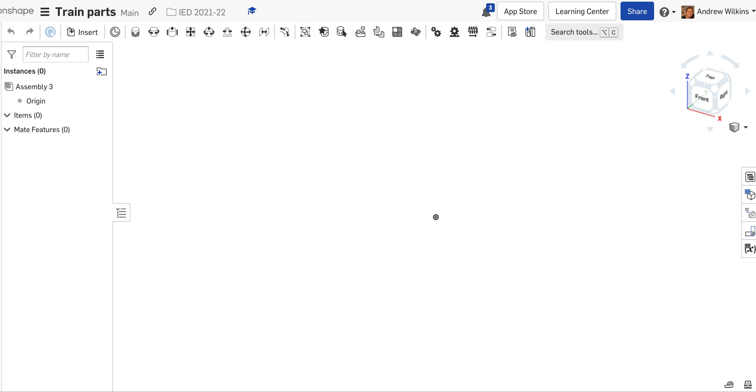All right, I'm going to show you how to assemble your train in Onshape. The first thing you need to do is make sure to create an assembly, and then you're going to insert the parts. So I'm going to insert...

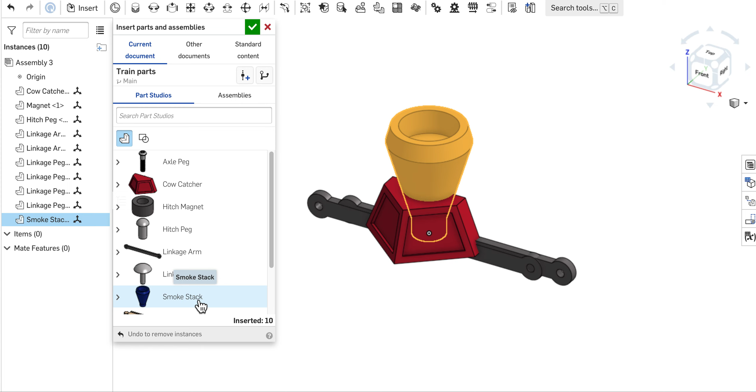Let's see, 4 parts. You will not have an axle peg, we'll pull that from another spot. So we need to insert 1 cow catcher, a hitch magnet, a hitch peg, 2 linkage arms, and I'm just clicking for the number of times I want it, 4 linkage pegs, a smokestack, the track we'll do later, a train body, and 4 wheels.

Once I've inserted those, I can click and that will place all of those, and then I'm going to get axle pegs from the standard content.

In the standard content, we should have ANSI inch selected, bolts and screws selected, socket head screws selected from the class, and then in the component, socket button head cap screw is what these are called. Your size, you're going to want to select 1/4-20, and then the length is 1.

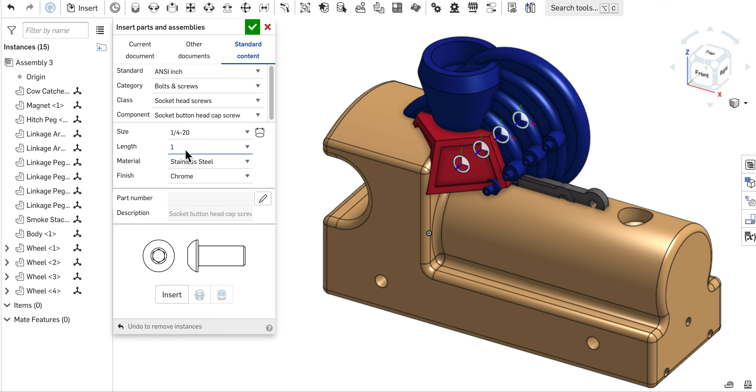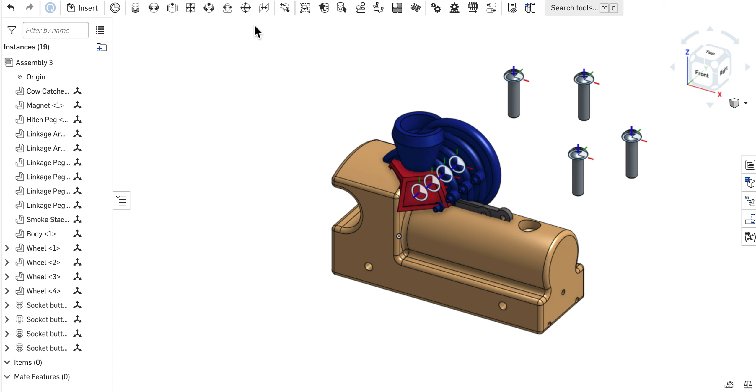After you have those all selected, you will click the insert button and then place, and that will do 1 at a time. So there's 1, 2, 3, and 4. And then I'll hit the check mark, and I will begin assembling the body, or the train.

So I'm going to start with the body, and I'm going to move it just kind of out in the way for a little bit, and I'm going to choose to fix this. So I did a right click, and now I'm fixing the body in space. And so what that does is it makes it so I can't move it at all.

That's going to be beneficial so we can tell if the wheels are moving the way they're supposed to. Next thing I'm going to do is I'm going to figure out all the things that are going to be fasten mates, and I'm going to take care of, actually, I'm going to do the revolute mates first, and then I'll do the fasten mates.

So right now I'm just kind of moving things away so it's easier to find them. So there's that, move that up there, and then I think I'm just going to grab all 4 of those things and move them. Oh, that was fun. Over here. Okay, that should be fine.

Alright, so the first thing I'm going to do is get these wheels connected. If you don't like that the mates are showing up on the wheels, I can go ahead and hide those. 2, 3, 4. That'll make it easier for you to see.

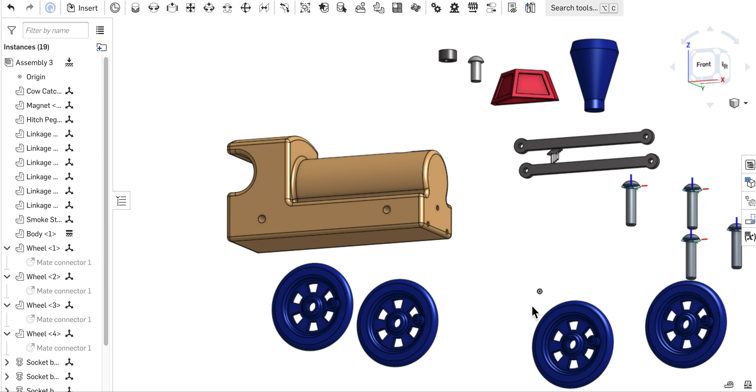Okay, so what I really want is I want the wheels to revolve around the axle that's going to go through this hole. But the computer doesn't really need the axle there in order to do a revolve. So what we're going to do is we're going to just do a revolute mate.

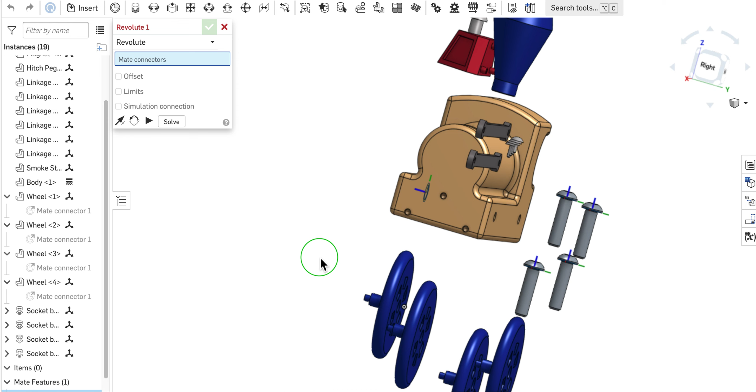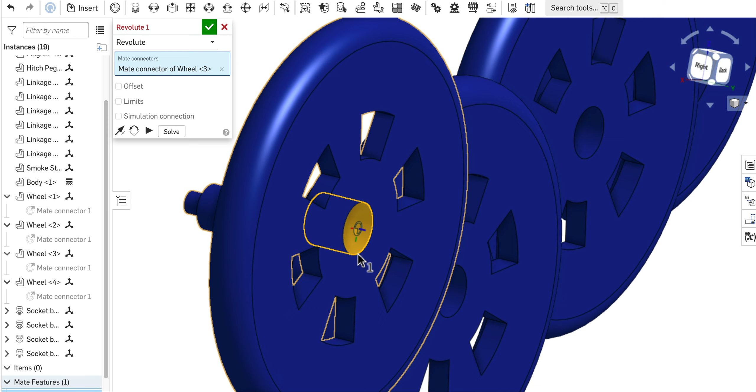And I want these wheels to butt up right against the body. So what I'm going to do is I'm just going to select the, oops, that made it difficult, didn't it? I'm going to select the outside of the hole. So that right there. Oh, I shouldn't say the outside, the back part of the hole of the wheel.

And I'm going to connect it to the outside part of the hole on the body. And it's showing going the wrong direction there. So I'm going to switch directions. And that's the right direction. And then I'll hit check mark.

And I can check and see that this thing actually revolves. And it looks like it's revolving, so that's good. There we go, that's a little bit better. I was having a hard time grabbing it earlier.

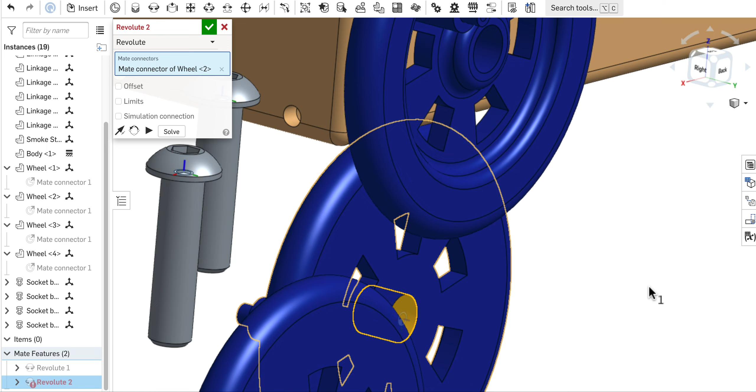And because I hit the check mark on that tiny box, a new revolute mate has already started or is waiting for me. So I'm going to do the next one between that hole and that hole. Switch the direction so it's facing outside, hit the check mark. And that one should also be revolving. Yep, looks good. All right, so now I'm going to go to the next one.

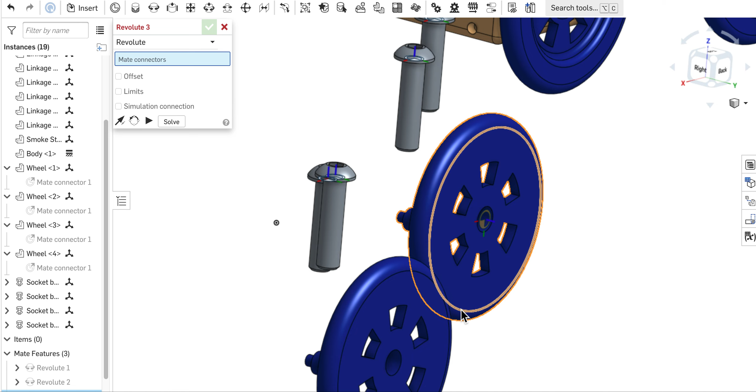I'm going to get the back of this hole. I'm going to get the outside of this hole. And that's actually connecting correctly. Check mark that. And then one more time.

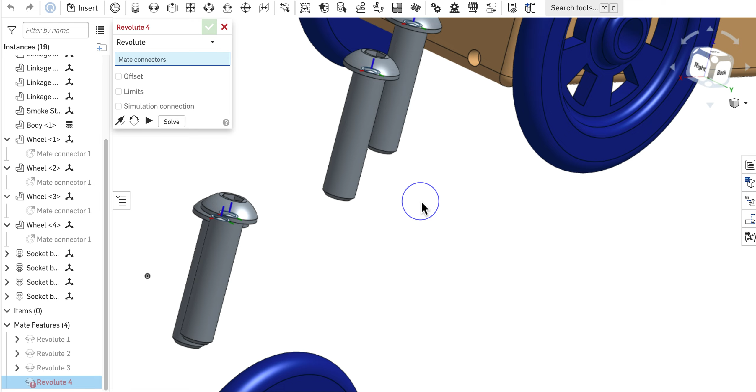I'm going to select the back of that hole, turn this around, and select the outside of that hole. Check mark that.

And now we're ready for the next part. So I'm going to keep on the revolute mate because my linkage arms are going to have to connect to these wheels in a way that they're allowed to revolve, because we need that piece on the inside. This piece right here is going to need to be able to freely revolve inside of the holes of the linkage arms.

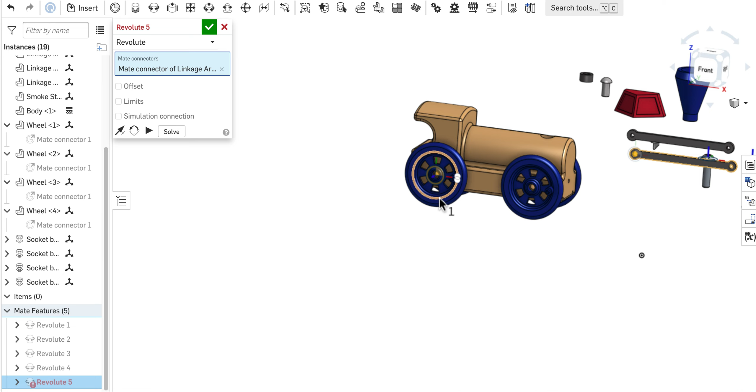So I'm going to choose the outside of this hole, and I'm going to link that to the outside of this thing right here. All right, it's going to connect outside to outside. One of the things to remember when you're doing the mates, you're basically telling the computer which two planes you want to be in line with each other. And so that's why I'm choosing the ones that I do. So I'll check mark that.

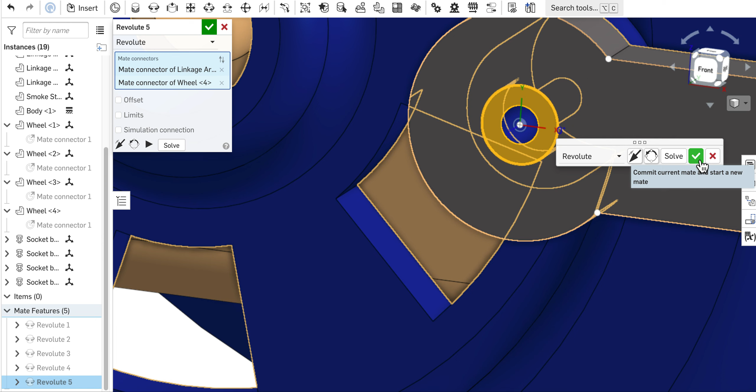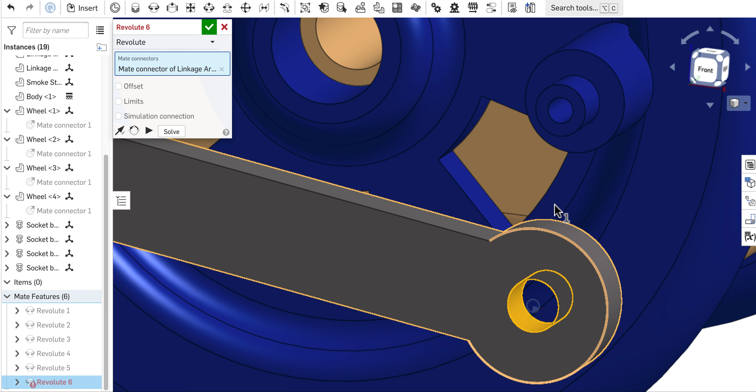It's ready for my next revolute mate. And this looks like it's already linked, which is crazy. It's actually not, that almost never happens. I don't know how I got that to happen. So I'm going to do the same thing though. I'm going to choose the outside of this hole and the outside of this. Link those together, check mark, good to go.

And then if I move this bar, it should move the wheels. Yep, now right now it's going all wonky. We can fix that later. Eventually it kind of just fixes itself, but then later on it'll go wonky again.

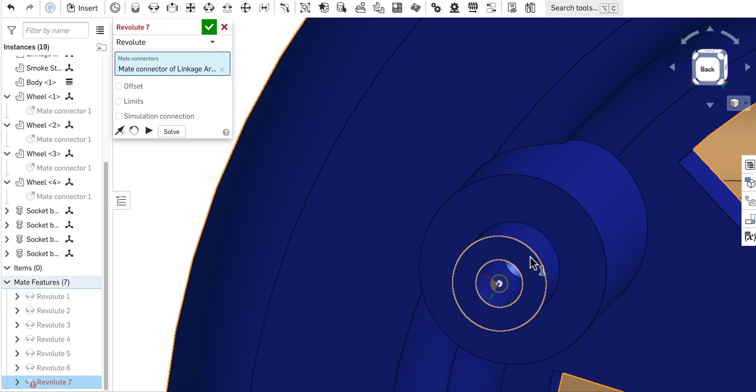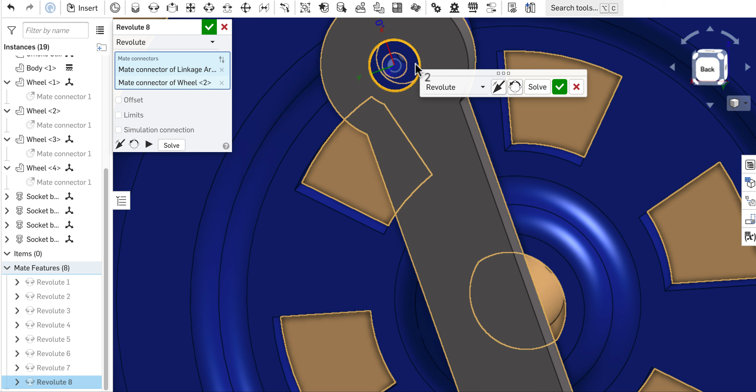So I'm going to do that same thing to the other side. Going to find my linkage arm, find the hole, click on that, and then it doesn't matter which one of these right now that I choose. So I'll choose this one. That one's ready to go. And then choose this. And then choose that right there. Check mark that. And then should be good.

All right, and that really is all the revolute mates I should have. The other things are going to be fastened, so I'm going to hit the X on this box and be ready for fasten mates. I'm going to double check this linkage arm seems to be working, which it is. Great. All right, so now what I'm going to do is I am going to do a whole bunch of fasten mates.

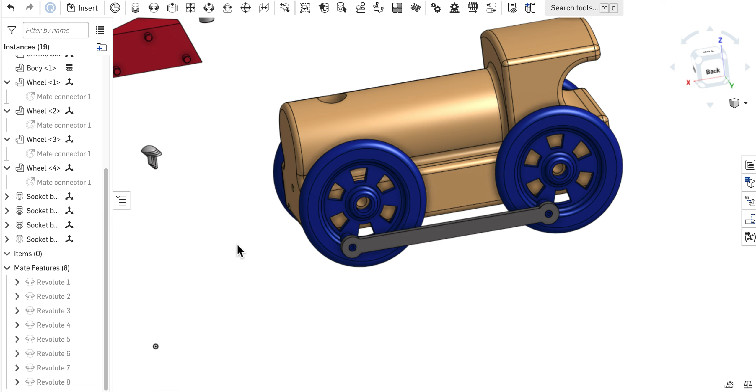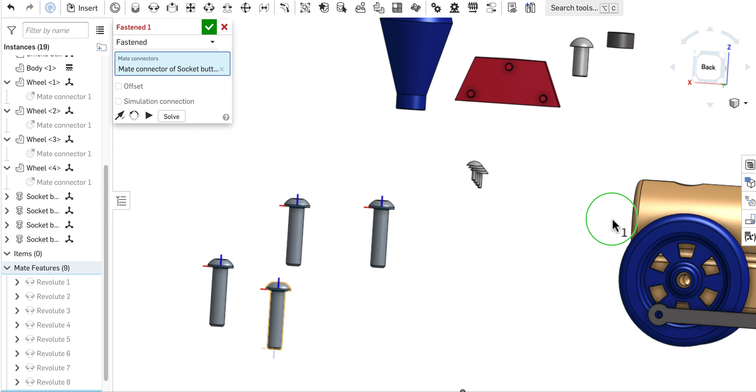So I'm going to choose fasten mate, and what I want is I want this axle peg to go into the hole all the way towards the bottom of this hole. So I'm trying to force the computer to know what to put onto what. So I'm going to put the bottom of this axle peg, sorry that's kind of hard to see. That's going to be my mate connector there. I'm going to link that to the bottom of this hole right here.

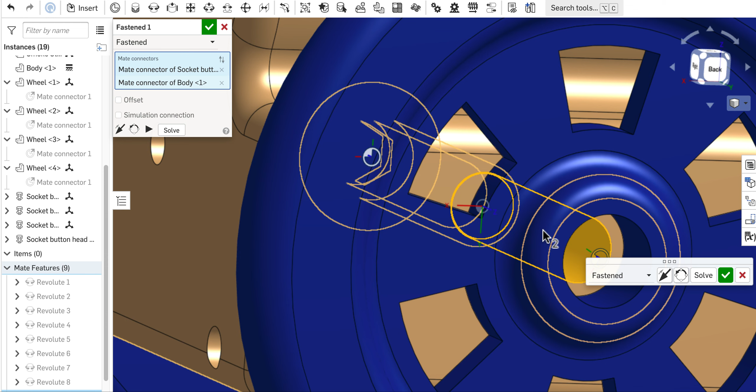I have to be careful because I don't really want the pointed bottom, I want the bottom of the cylinder. So right now I have the cylinder. I'm going to hold shift so I can move to that back spot right there. And then I'm going to take a look, and it looks like that thing is on the other side of what I want. So I'm going to switch directions. And then furthermore, it's not really out far enough. There's some distance in there that we need to make up.

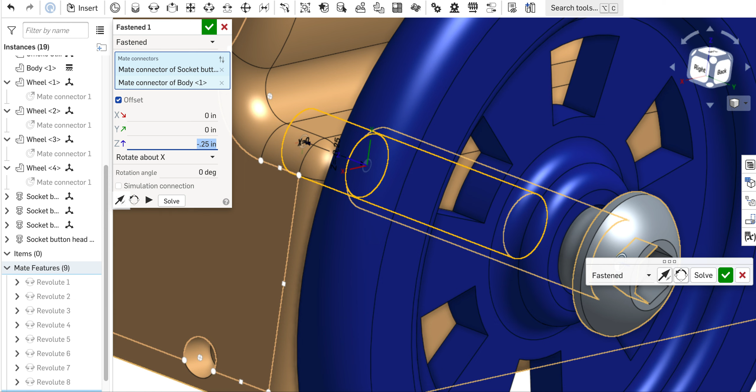And so I'm going to throw an offset in there in the Z direction. And I think 0.25 inches is probably too far, but I'm going to try that. Okay, and that made it go the wrong direction. So I'm going to do negative 0.25. All right, and that brought it out pretty far, definitely farther than I wanted.

So I'm going to try negative 0.14. Okay, and that looks pretty good. There's a little bit of a gap there, but that's a reasonable amount of gap to allow the wheel to actually spin if I were creating it.

Now I want to make sure that I use that same offset every time. So I'm going to make sure that it's a distance of 0.14. It might be negative, it might be positive, depending on which side of the train I'm on, but it should work out. Oops, and I accidentally hit the check mark on the main box instead of the little box.

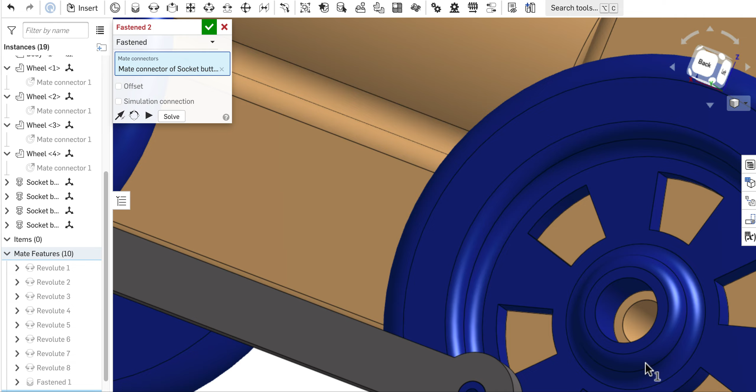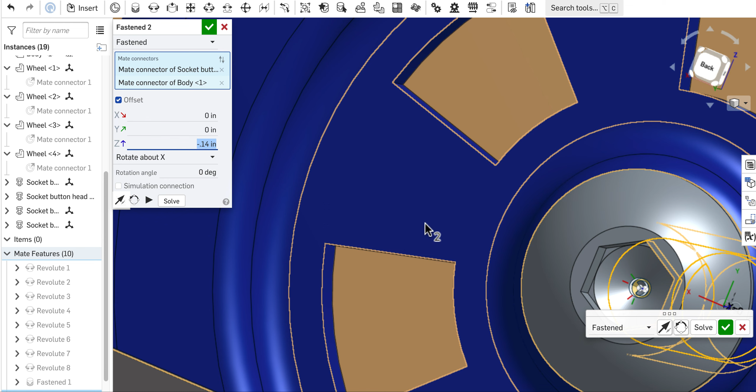So, all right, so I'm going to choose that mate right there, and I'm going to go to this hole right here. And once again, I want to choose the back of the hole and make sure the direction is right and set my offset. That's, you can get the idea here. Negative 0.14. There we go. I'm going to check mark this box and then do the last two.

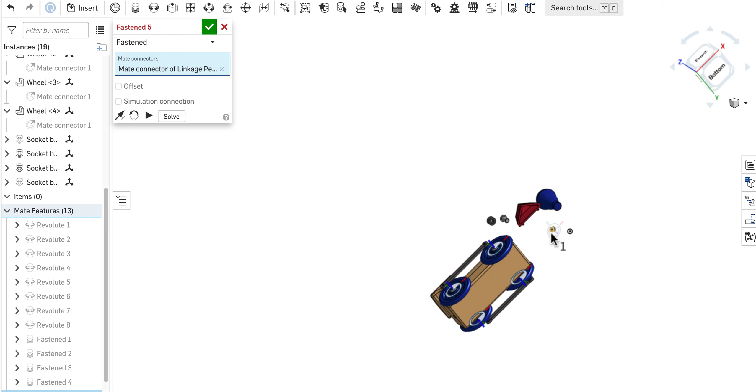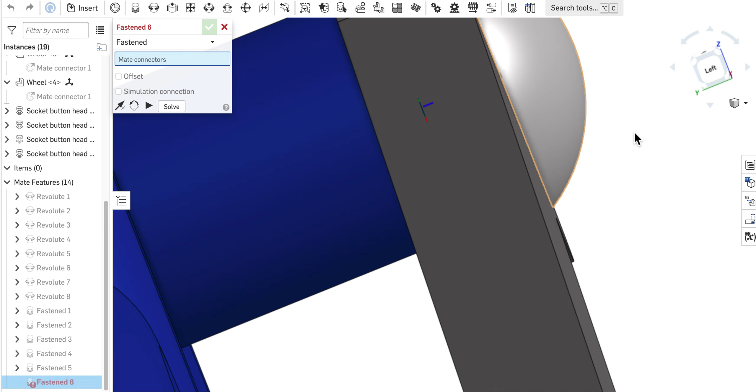All right, now that I have all the axle pegs in there, I'm going to put the linkage pegs in. Very similar sort of thing, although this time I don't think we're going to need an offset. So I'm going to choose the bottom of that and have that go into this hole right here, all the way to the back. Switch direction, check mark. That looks pretty good there. And do that for all four of these.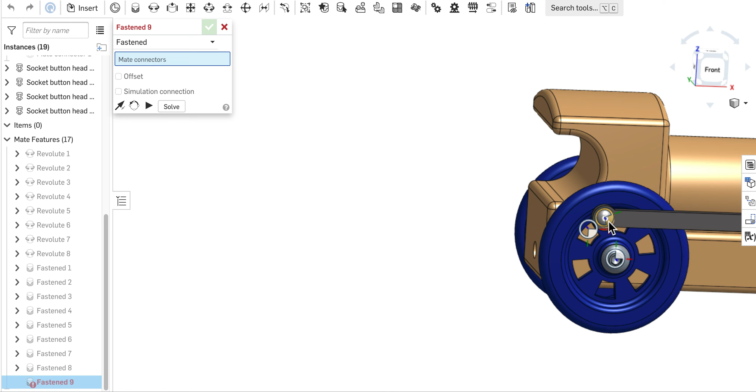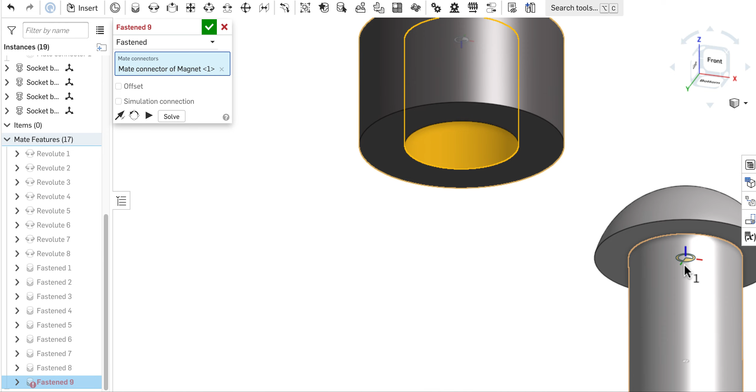Alright, now that the linkage pegs are in there, I am going to fasten the rest of these things. This magnet goes onto this hitch peg, and basically I just want the top of this hole to connect to the top of the cylinder. So I just have to make sure to choose the top of the cylinder.

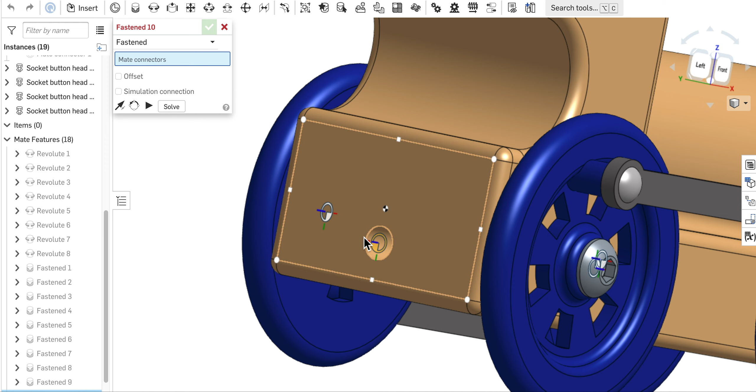There's that. And then I want this cylinder, or not the cylinder, this ring, which is a magnet, I want that to connect to this right here. The magnet should be sticking out, so what I'm actually going to do is pick a point on the bottom of the magnet and then pick the circle right here, and that should match really well.

So I'm going to zoom in here. I want to make sure that I'm on the surface of the magnet. I'm going to choose that as my first mate, and then zoom in on here, get the outside of that hole, switch direction, and then you notice that the peg didn't come with it, but if I hit the solve button, it'll show the peg with it, and then I'll hit check mark, and then that'll happen.

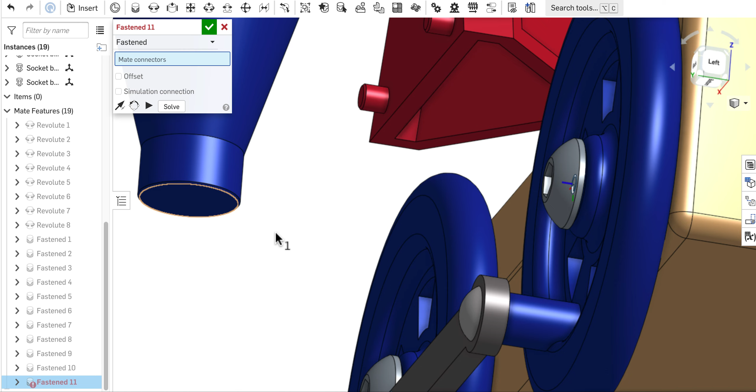So we have that, and then we have the smokestack that we need to do. So I'm going to choose the bottom of the smokestack. I'm going to choose the cylinder bottom. Make sure the smokestack's sticking out. That looks good. Check mark there.

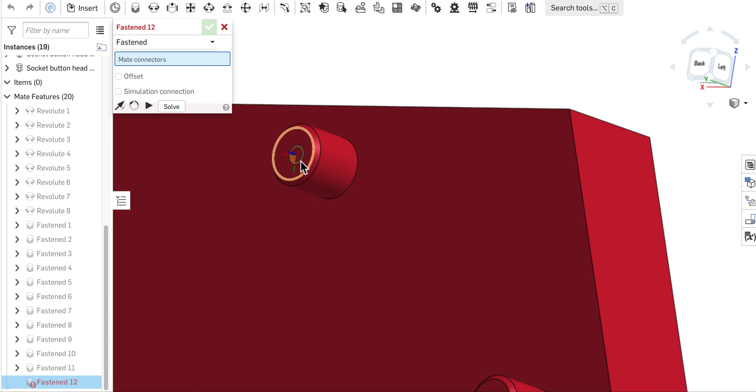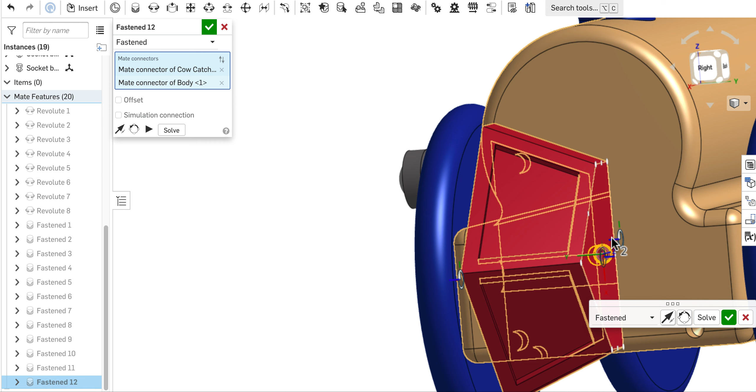And then the last one, again, since we're doing a fasten mate, we're kind of gluing it in. So I only have to pick one of these 3 pegs to glue, quote unquote, into the front of this thing. So I chose the top hole. So I got to choose the top hole here, all the way to the back. Switch directions, and then you'll see it's rotated in a weird way. So I just rotate it until it fits the right spot. That looks good. Check mark, and we're good.

Okay, so for those of you that are like, yeah, okay, Mr. Wilkins, how do we really know that this is put together well? All right, so your little secret here is if you go to this menu and you choose... where to go? Oh, I have to get out of this first. If you choose interference detection, you can highlight all of the parts there, and it'll show you where there's interference happening between parts.

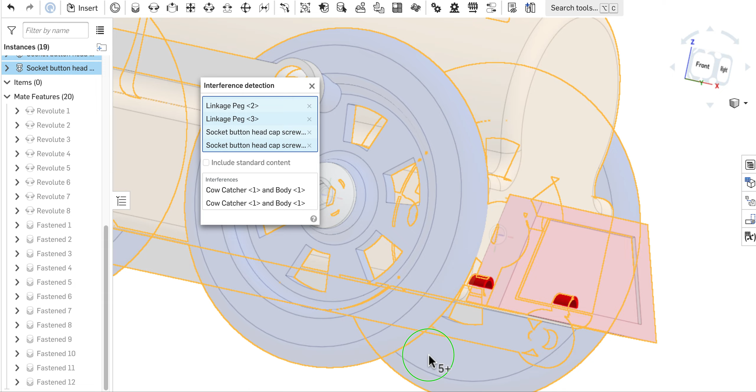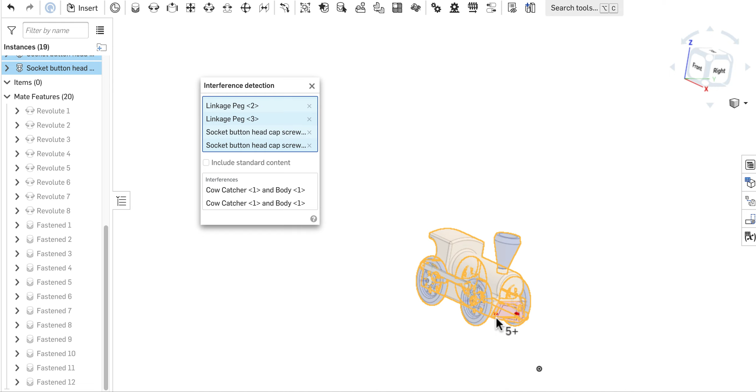Only interference I'm seeing right now is it looks like the holes are a little bit off from each other. That's really interesting, isn't it? So maybe there's something wrong with the body, and those holes are not exactly fitting the way they're supposed to. That's very interesting, so something to pay attention to for sure.

If this is a train that we were trying to make, okay, so that might be where a potential issue is. All right, well, that's that. And then now what we got to do is we need to add in the track. Oh, and yeah, we're good.

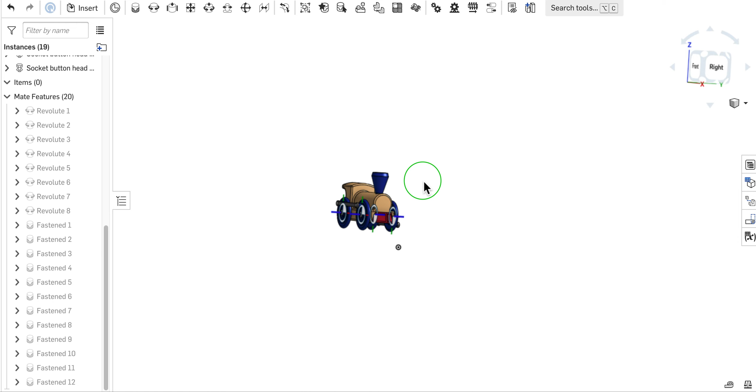All right, so before we add in the track, I'm going to do a couple things. The first thing I'm going to do is I'm going to make it so that you cannot see the mate connectors on those screws, because that gets really annoying. Makes it not look very good. So I'm not... oops, that is not what I wanted to do. I meant to hide the mate connectors. There we go.

Okay, I hid all those. So now what I'm going to do is I'm going to insert the track, and I'm going to do 3 pieces of track. All right, so I'm going to do 1, 2, 3, and check mark there.

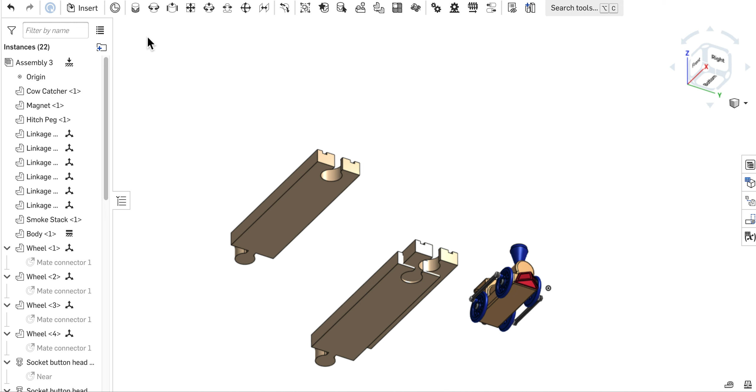Now I'm going to pick one of these, and I'm going to fasten the bottom middle of this track to the origin. That way it's locked in. All right, that thing is not going to move at all. If I try to click and drag it, it won't move.

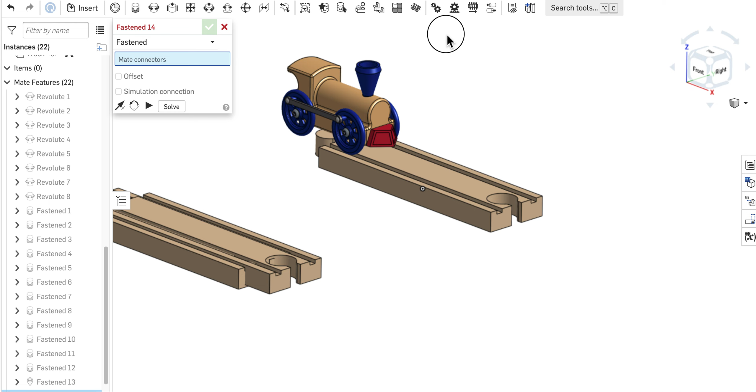Now my train right now can't move either because we chose to fix it. We're going to unfix it so that I can move my train. All right, it's going to get all sorts crazy right now. Then we're good there. It is now unfixed.

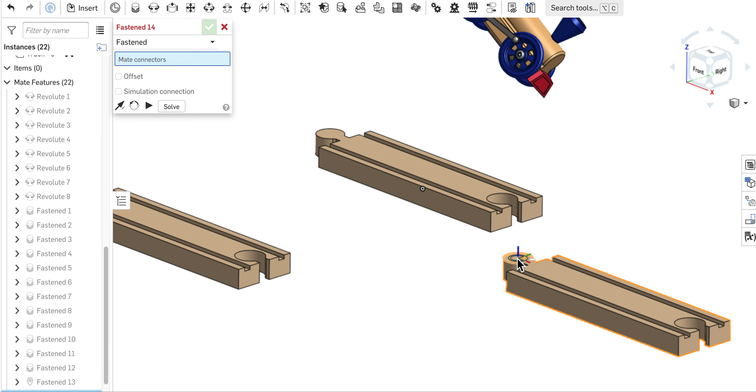And now what I can do is I can connect these track pieces together. So I want the tongue to go into the groove there, and all I need to do is choose a fasten mate and fasten the middle of that circle to the middle of this circle, and that should be good. Now I'm going to do the same thing with the other part of the track. So I'm going to do the middle of that, middle of that. Oops, that did not work. Let's try this again.

Middle of that. There we go. That's much better, check mark there. Tracks are lining up. Good to go.

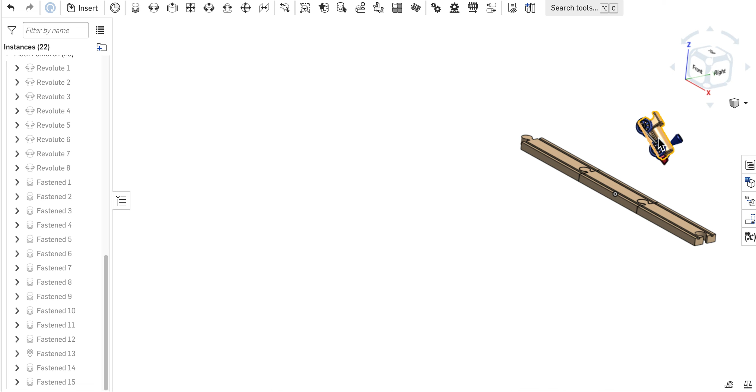So the last part is we are going to connect the train to the track. To do that, you're going to start with a slider mate. We want this train to basically slide along the track, and then we want its wheels to turn as it's sliding along the track. So first we got to set up the slide part of this.

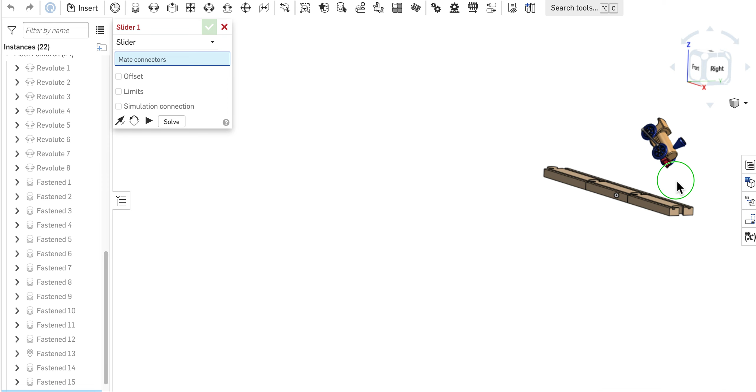What I'm going to do is pick a point that's kind of easy to reference. The key to doing a slider mate is you want to pick a mate on the surface that's perpendicular to the direction you're trying to go.

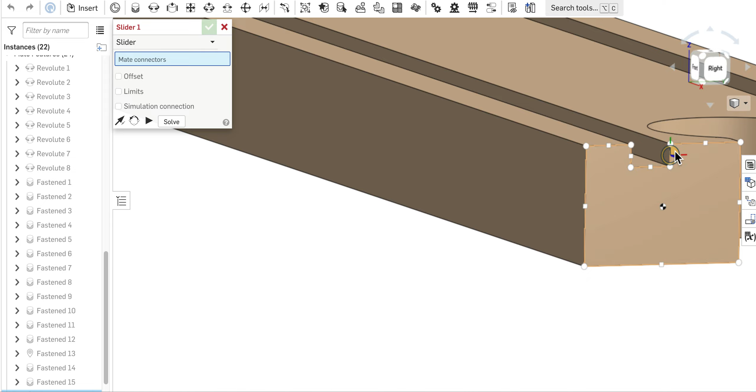I'm trying to go along this line that I've highlighted, but what I really want is the end of that line. So I'm going to choose this surface, and I'm going to choose this point on the inside top corner of the track.

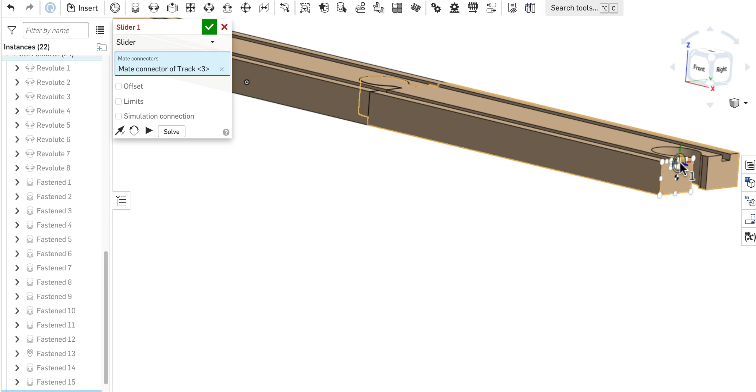I have to make sure it's pointing outward when I do that. So I chose the blue axis, which needs to be pointing outward away from the surface I'm trying to be on. That blue thing is called the z-axis, and what it does is tell you which direction the slider mate is going to go.

Now I want to line that up with something on the train that should be going essentially along that same direction. That thing on the train is going to be the corner where the fillet is made. So that corner right there is what I want.

I'm going to hover over the front surface of this train body, and hold shift, and go down. I want to make sure again that that blue line is pointing outward away from that corner, in the direction I want the train to go.

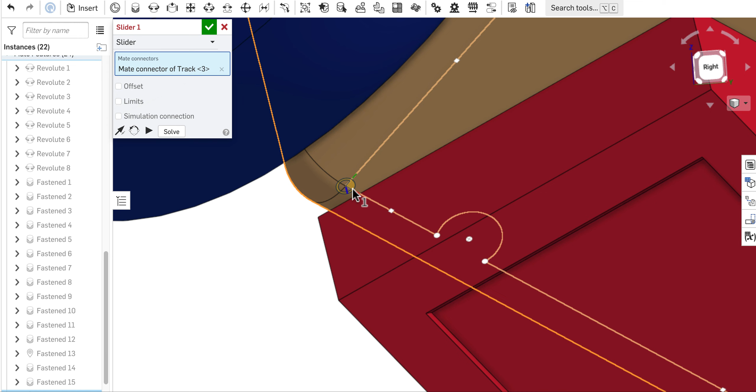It's going to move the body only, which is kind of frustrating — you're like, what is going on here? But again, if you hit solve, that'll bring everything together.

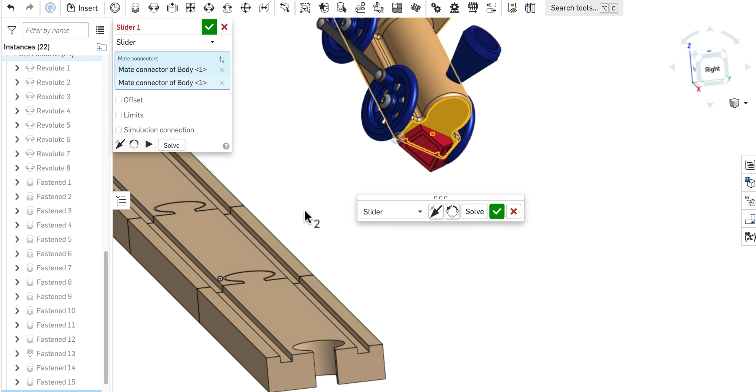I don't know why it's not connecting to the track right now. That's because apparently I chose the body twice. So let's try to do this again. Shift — there we go. Solve.

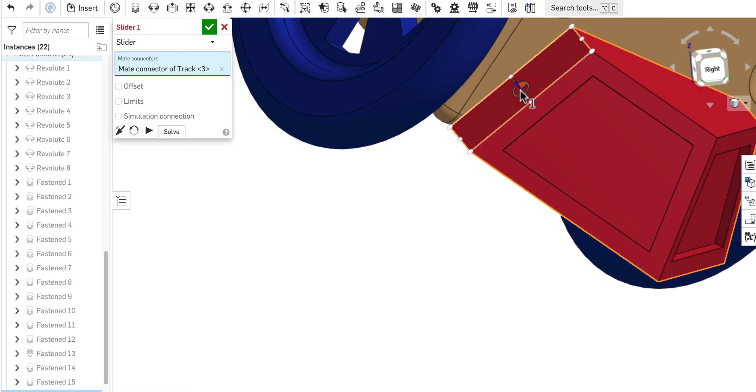I don't understand... let me see if... choose that... this is not working correctly. I'm going to try this one more time. Slider mate between that and that. There we go. Solve.

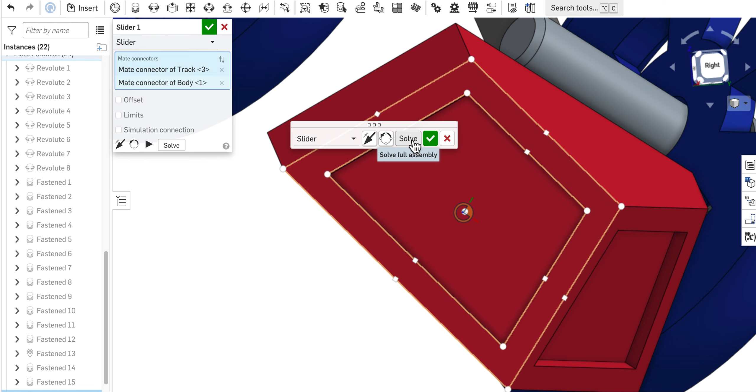That's better. Alright, it's better in one way, but you'll notice the track kind of looks like jello, because the train's just sunk into it. That's because we need to set a couple of offsets so this sits on the track correctly.

So we're going to set two offsets. The first offset is that the x-axis, the one going this direction, needs to be offset by 0.05 — probably negative 0.05, but I'll try 0.05 and hit enter. Yeah, that moved it away from the center. I want to move it closer to the center, so I'm going to do negative 0.05.

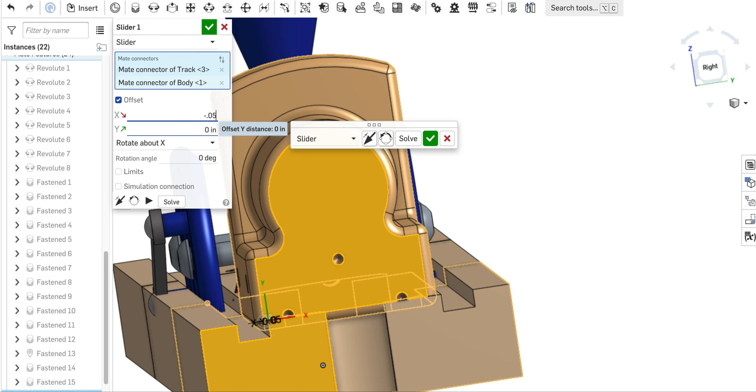I'm going to hit solve, and that's going to bring everything together, and you can see now that the wheels are right in the middle of the track, which is exactly what I want.

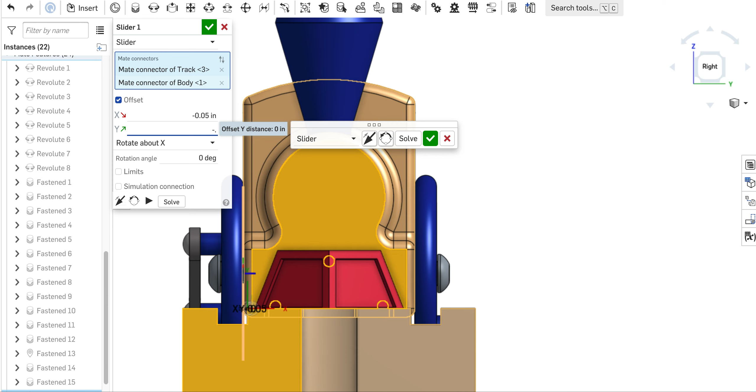Then I'm going to move the y-axis, a distance of 0.54 — I have to go negative so it goes up for me. I'm going to hit the check mark on that, and there you go. Now it looks like it's on the track, and it's riding along the track, which is good.

Now you can tell that the wheels are not moving — they're just sliding, sliding, sliding, and that's kind of weird because that's not how that train's supposed to work.

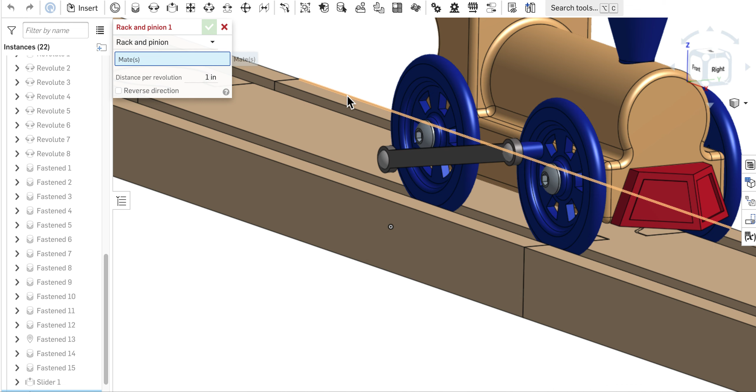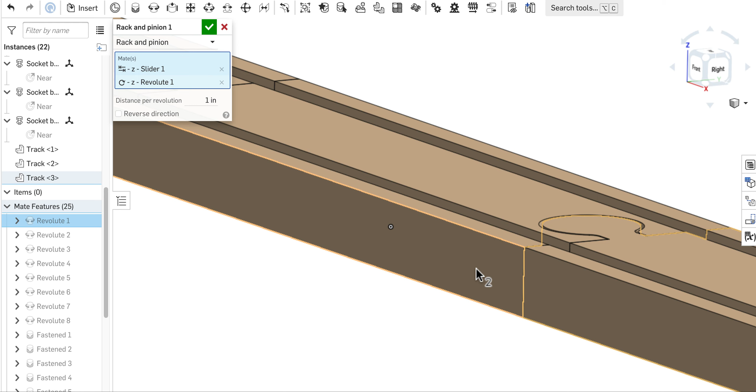So I have to set up a relationship between the slider mate and these things turning. I'm going to do what's called a rack and pinion. On the rack and pinion, I need to choose a slider mate and a revolute mate that are going to connect with one another. The slider mate is pretty simple, I'll choose the one I just made. For the revolute mate, I want to pick one of the revolute mates I did with the wheels, my first 4, so I'll choose revolute 1.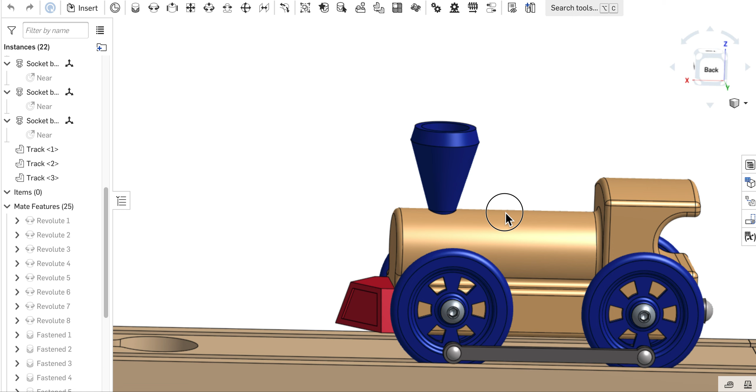There's some stuff that's going to happen here that doesn't simulate very well until we're out of this window, so I'll hit check mark and switch over to the other side. As I slide this thing, you'll notice the wheels are going, but in a weird way. First, they're going the wrong direction, and secondly, they're going way too fast.

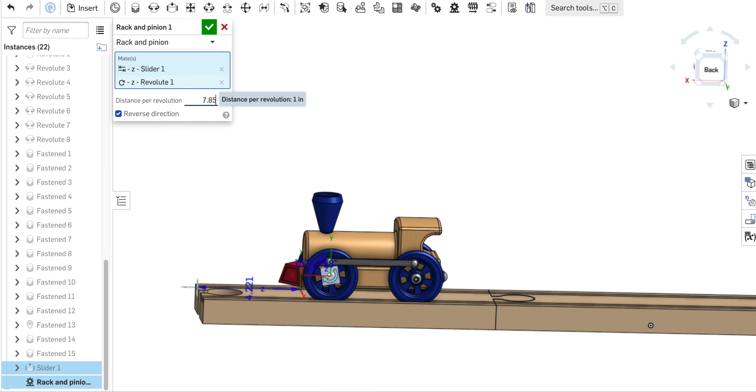So I need to edit that rack and pinion in 2 ways. First, I need to reverse the direction so that when I move this thing backwards, the wheels move backwards too. They were kind of there, it was hard to tell. Also, right now it's going 1 inch of distance on the track for every time this wheel goes around. But the problem is this wheel is way bigger than a circumference of 1 inch, it's a 2.5 inch diameter wheel. So when I take the diameter, 2.5 times pi, I get approximately 7.85, so it should be moving about 7.85 inches per revolution.

There we go, now it looks like it's actually going the way it's supposed to. Fancy that, now it looks good. But on the other side, it's not moving at all, it's still sliding.

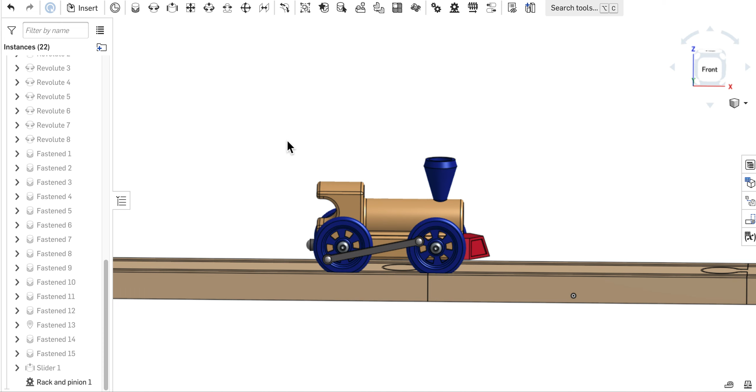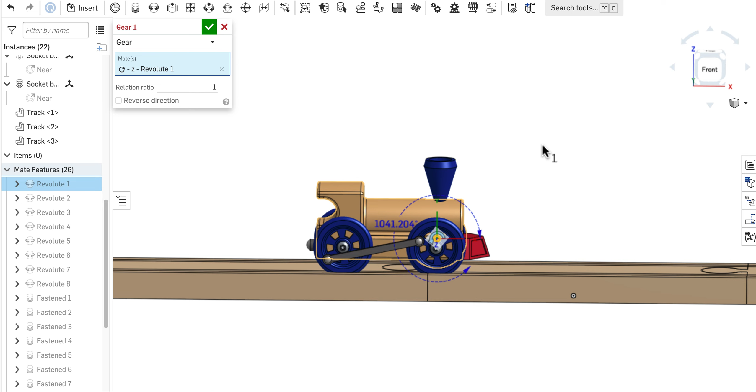So we could either do another rack and pinion with a revolute mate from this side, or we could do a gear relation. This gear relation basically allows 2 things that have revolute mates to turn at a ratio compared to each other. So I'm going to choose revolute 1, the one I used on the other side of this train for my rack and pinion, and then also choose one from the other side of the train, revolute 3. Hit check mark on that. The ratio needs to be 1, because I want every wheel turn of this to be equal to 1 wheel turn of that, so that's good.

Check mark, and now I need to check this side and see if it's revolving. And it is, it's going back and forth. Looks all good. Okay, now every once in a while there's a chance this thing is going to get wonky on you.

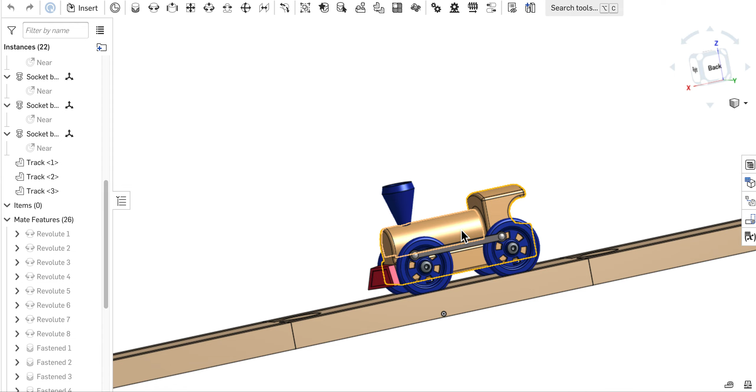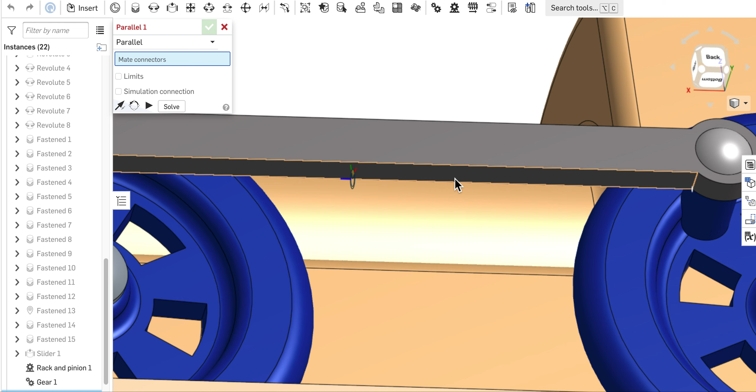The linkage arm, if you want to make sure it always stays level like this, then what you're going to do is choose what's called a parallel mate, and just basically tell which surfaces you want to remain parallel. I want the bottom surface of this linkage arm to always stay parallel to the top surface of this. It's going to move it there, but if I hit solve, it's going to put it right back, because a parallel mate does that.

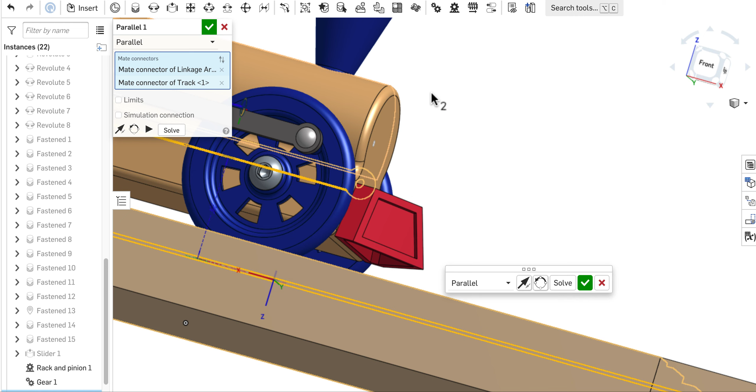Now within this same parallel mate, I'm pretty sure, let me double check, I should also be able to do the bottom of this linkage arm and hit solve. And now, is that, can I only do 2? No, what do you know, I can only do 2. So I guess I have those 2 right now.

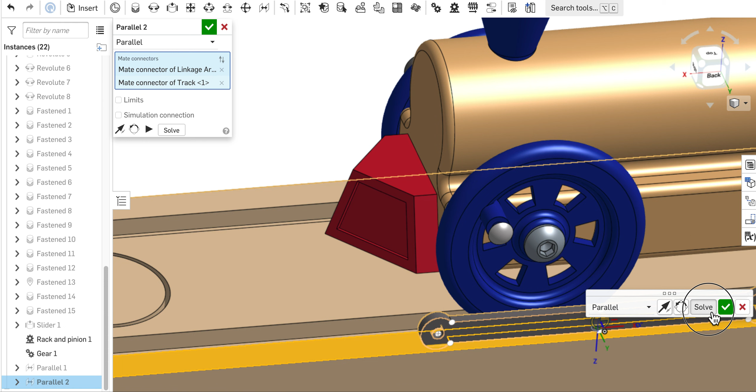I'll hit check mark, and then I will do this one, so the bottom of this to the top of this. Solve. There we go, alright, so now it should be working. Those things are going to stay parallel at all times, which is really helpful.

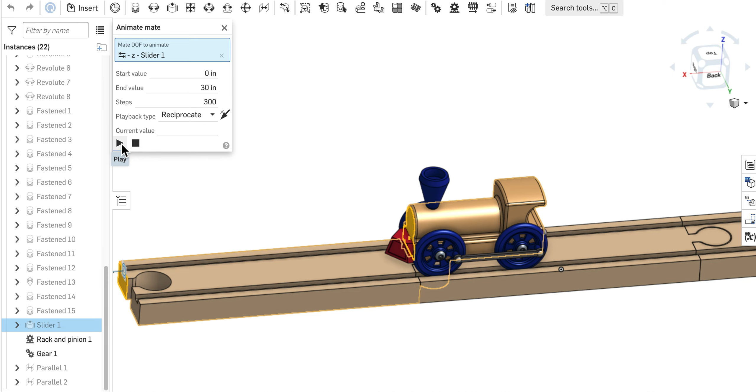Woohoo! And then the last thing to show you is that you can actually animate this and make it move on its own. So if I right click on my slider in the browser, I can go to animate, and this thing's going 7.5 inches at a time, so I'm going to choose 0 to 30 inches as my start and end value. Reciprocate just means it's going to go back and forth. I'll hit play, and it starts at that edge of the track, and there it goes, it's moving.

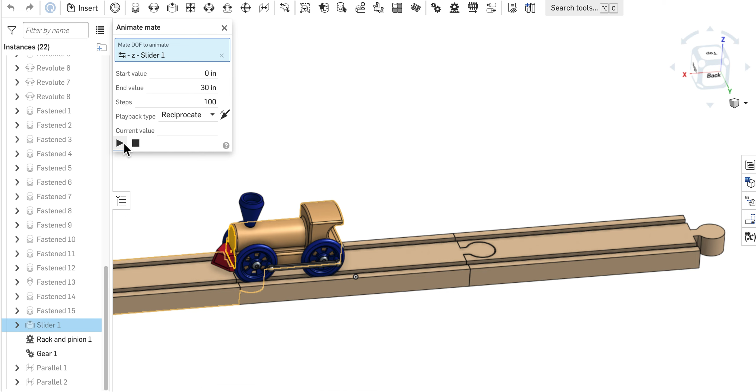That's pretty cool. If I want to speed it up, I just change the number of steps for this to work. So if I do 30 steps, yep, it's going to go really fast. If I do, what was it, 100, should go a little bit better. Yep, a little faster, and so on. So there you go, that is everything.